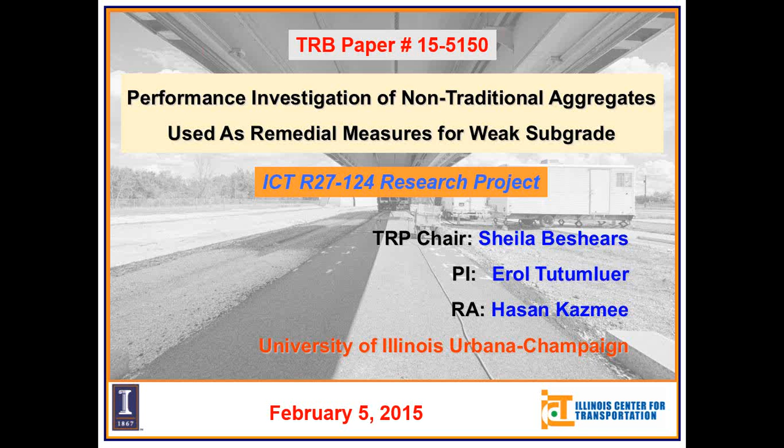Next, the presentation outline. First, we will present some background information. Then we will show the materials selected for this study for performance specification of aggregate subgrade materials. Then the test section layout proposed for construction of the test sections built for this project. We'll explain how we modified the subgrade strength to match a certain strength, like CBR3 or CBR1, followed by construction and quality control. Then we'll present test results from accelerated pavement testing and associated pavement forensics like dynamic cone penetration testing, variable energy panda penetration testing, ground penetrating radar, or even actual test section trenching images. Finally, we'll summarize the research progress from this project.

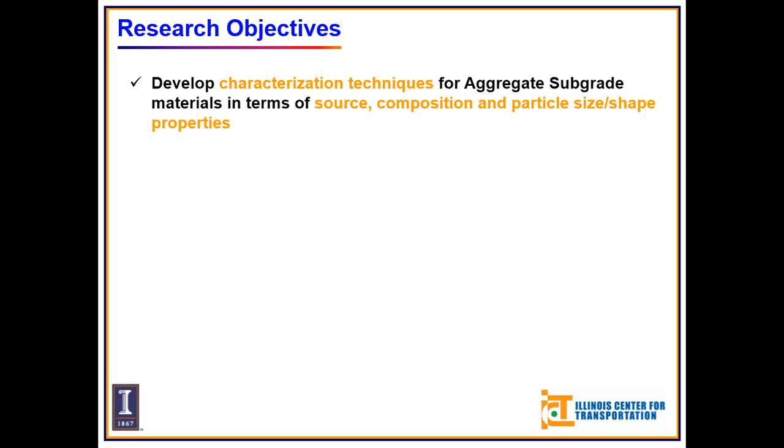Research objectives: the primary objective of this study is development of characterization techniques for aggregate subgrade materials in terms of source, composition, particle size, and shape properties. That means different districts of IDOT use different types of aggregate subgrade or sub-base materials for weak subgrade stabilization, and for a majority of those materials, we don't know how they will behave in the field. Some materials are so large, like 6 to 8 inches top size, that conventional laboratory testing is not enough to characterize their properties. So that's why we were shooting for evaluation of field performance.

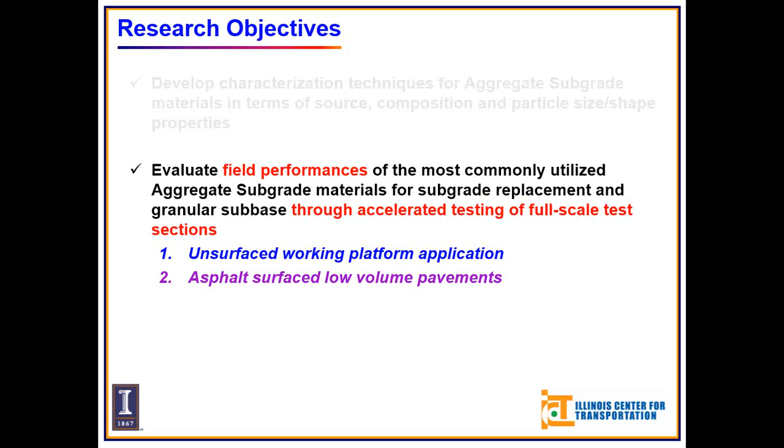How do we do that? We construct test sections with those materials and perform accelerated pavement testing. For this, we have built 12 different combinations of unsurfaced working platform or construction platform, and 12 different combinations of asphalt surface low volume pavements. According to those results, we'll then revise and develop material specifications governing the use of these materials.

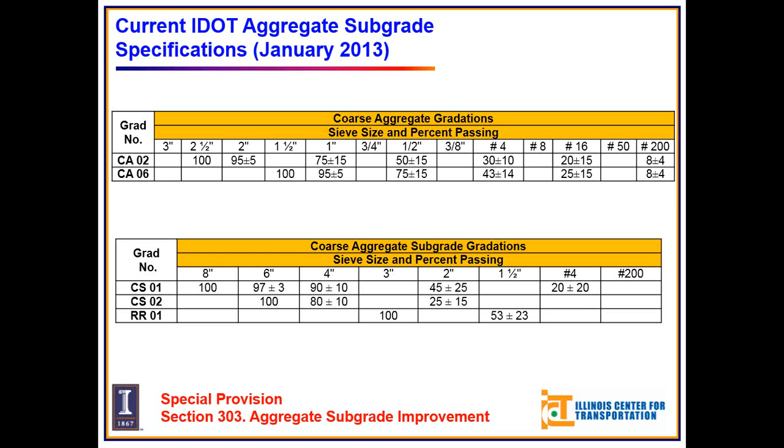And finally, we came up with 6 different types of aggregates for aggregate subgrade material and 2 different types of materials for capping material. The 6 different types were named type A, B, C, D, E, and F.

Type A was the railroad ballast size material, called RR01 gradation. Type B is large size crushed concrete, rubblized concrete opted to fit in the CS01 gradation band prescribed by IDOT. Type C is basically primary crusher run.

Most of type C is in the size range of 4 to 6 inches, some even as large as 8 inches. Then we have a 60-40 blend of large recycled concrete and recycled asphalt pavement materials, which was also expected to fit in the CS01 gradation. Type E is the coarse fractionated RAP with very limited fines, even less than 1%.

Type F is the large size base course aggregate, CA02. It's very similar to CA6 material but with a larger top size, meaning 2.5 inch. And finally, type G is the capping material, the typical Illinois base course aggregate, a dolomitic material that fits in the CA6 gradation band.

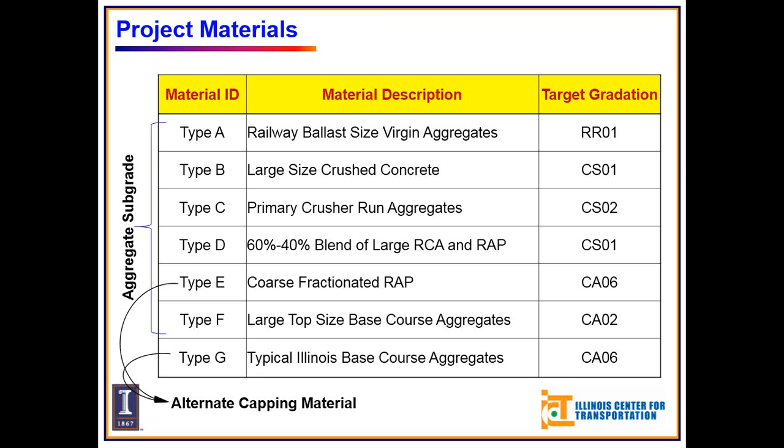These two are recycled materials: type B is the crushed concrete and type D is the 60-40 blend. These are somewhat well graded, but type D doesn't fit in the CS01 gradation band we were expecting. Type G and E are comparatively very well graded, and type G had almost 10% fines.

And finally, type F is the CA02, almost similar to CA6 material, just with a larger top size. Here we've got the top size as 2.5 inch.

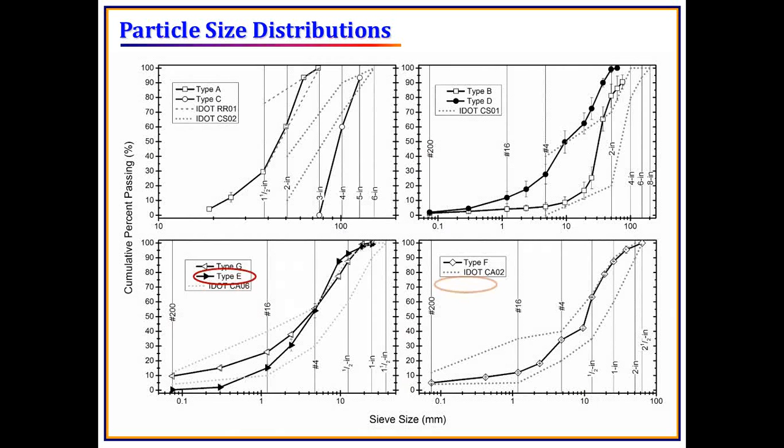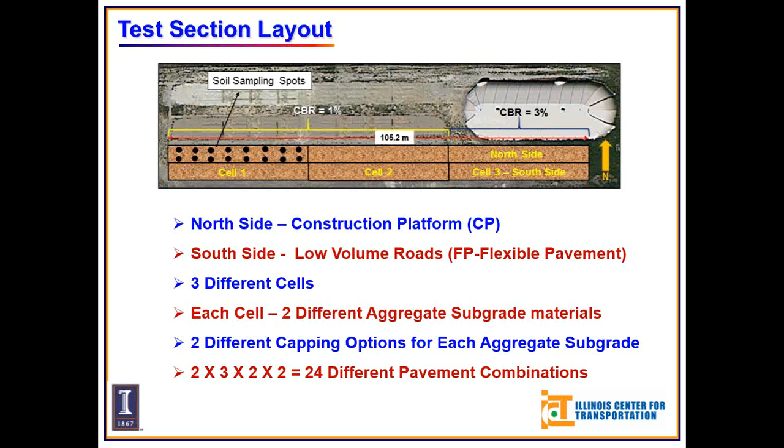So we divided the whole test strip into 3 different cells, cell 1, 2, and 3, and each of the test cells has 8 different combinations of pavements. On the north side, we have 4 different combinations of construction platform, and on the south side, 4 different combinations of HMA pavements, so 24 different pavement combinations.

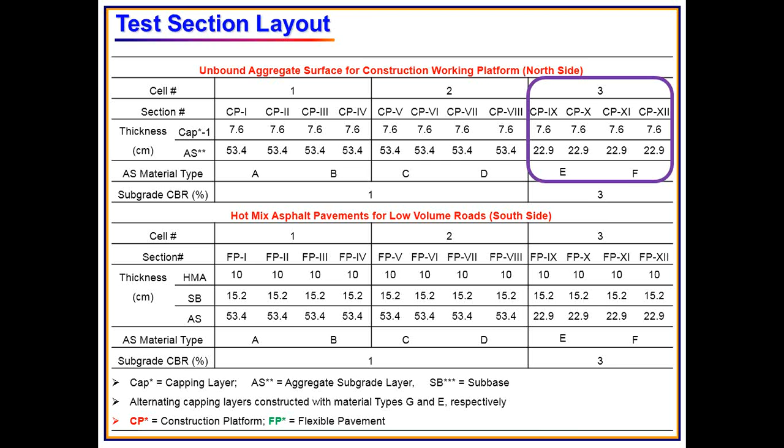Because of time limitations, my discussion will only be limited to the cell 3 construction platform performance evaluation. These were the overall layout of the ATLAS test setup. When we place one cell of material on top, it can cover up to 4 sections on one side, so what I'll be discussing will be construction platforms CP9, 10, 11, and 12, these 4 sections.

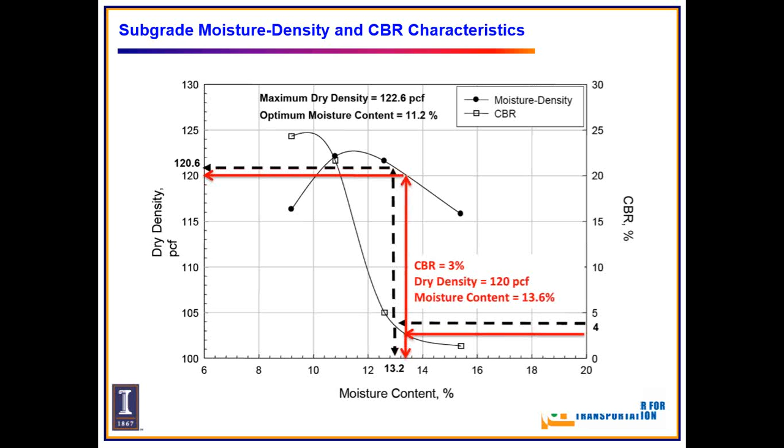Before going to the field, we had already established the moisture density relationships the soil was exhibiting, and for that corresponding density and moisture content, what our strength level was in terms of CBR. So that was already established. Like for CBR 3, the dry density was 120 PCF, pound per cubic foot, and the moisture content was 13.6. Similarly, for CBR 1, the target moisture content was 15%, I guess.

So we went out to the field, scraped the materials, tilled them to a depth of 12 inches, and then collected soil samples and identified the moisture amount with the microwave. We were trying to plot the moisture profile all over the test strip, like for cell 1 or cell 3, whatever we were targeting, and after plotting the moisture contents over that longitudinal and transverse distance, we were identifying the zones of moisture deficiency.

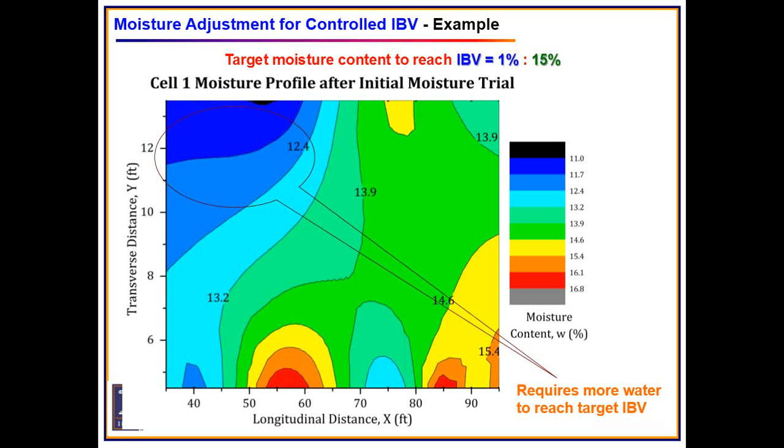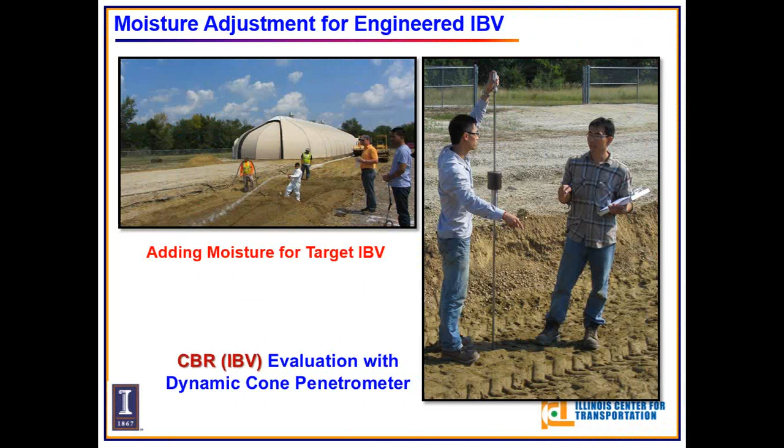These are some pictures of the construction and quality control that we've done. Once the subgrade strength was matched, we sealed the subgrade with an asphalt coating so there was no moisture escape, and on top of that the aggregate subgrade materials were placed.

In the meantime, we tried to maintain a grade since the compaction of this type of aggregate subgrade materials, which are very large size, sometimes becomes very difficult. So that's why we tried to maintain the grade using a laser guided grade control. Also, on top of the aggregate subgrade materials, we placed aluminum foils so that we can track subsurface deformations or subsurface rutting with the ground penetrating radar.

We have also used a nuclear density gauge to check the density, and also used a lightweight deflectometer and geogauge for the in situ stiffness parameters. Once we constructed the pavements, this was the finished capping surface and the finished HMA surface, with increments of rutting progression during the accelerated pavement testing.

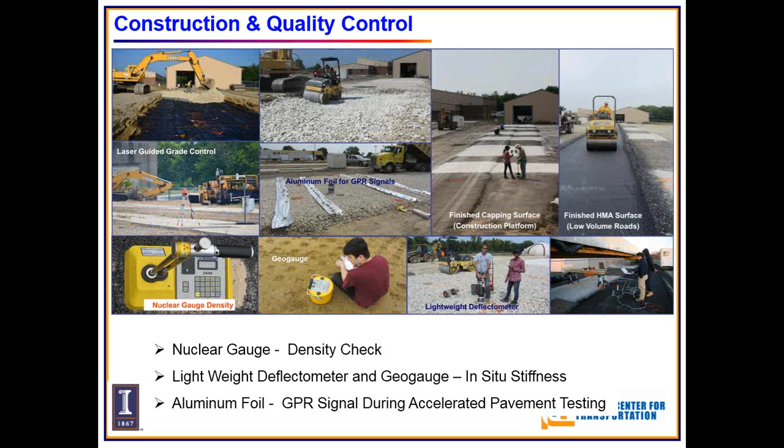We have also done the ground penetrating radar scanning. This was the nuclear gauge density. For sections 17, 18, 19 and 20, section 17 refers to CP9, 18 refers to CP10, and 19 refers to CP11, and so on.

So in cell 3, for the aggregate subgrade materials, type E and type F showed very similar levels of compaction, and the dashed line you can see is actually the laboratory compaction characteristics that were earlier established in the lab with a standard compactive effort. Compared to this line, we can see that both type E and F showed comparatively lower achieved densities.

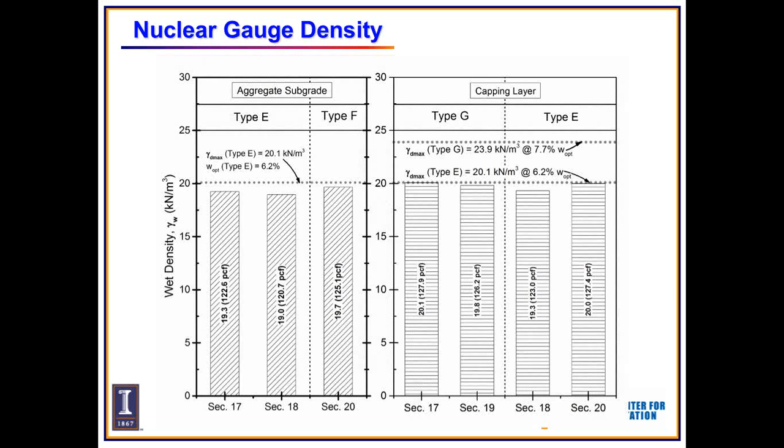Similarly, we have traced the nuclear gauge densities on the capping layers. All of these densities were checked with the backscatter method for the limited thickness. Compared to the type G laboratory maximum dry density, it was quite lower, but throughout that cell, we have seen that both type G and type E showed very similar levels of compaction.

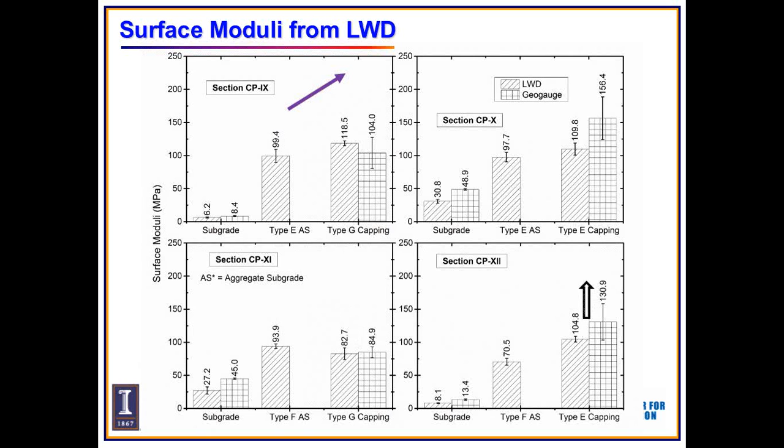These were the surface moduli from the lightweight deflectometer testing. We just used the Boussinesq half-space equation they prescribed to come up with these surface moduli. As expected, with the inclusion of every layer, there was a general trend that the surface moduli was increasing, and compared to the virgin aggregates, the type E aggregates, that's the RAP, was exhibiting higher moduli. That was also validated through previous literature studies.

Then we have also done the strength assessment with dynamic cone penetration testing as well as PANDA penetrometer. PANDA is basically a variable energy penetration testing. Along with that PANDA penetration testing, we did geoendoscopy. It's basically: you do the PANDA penetration testing, take out that cone, and through that same borehole, you shove an endoscopic camera, a small endoscopic camera, to see what sort of things are going on beneath the surface.

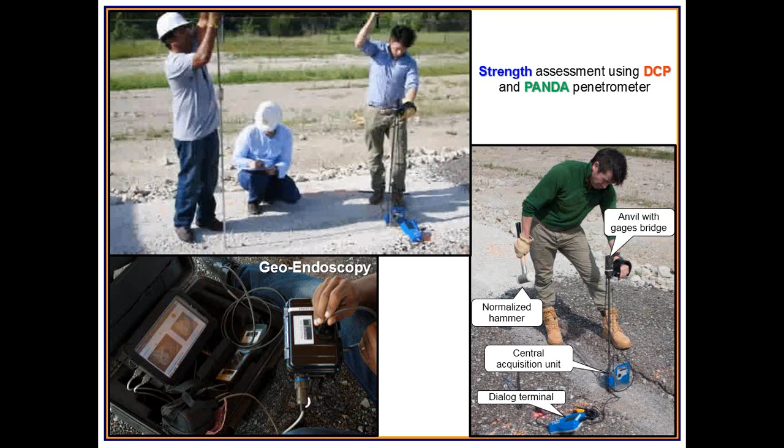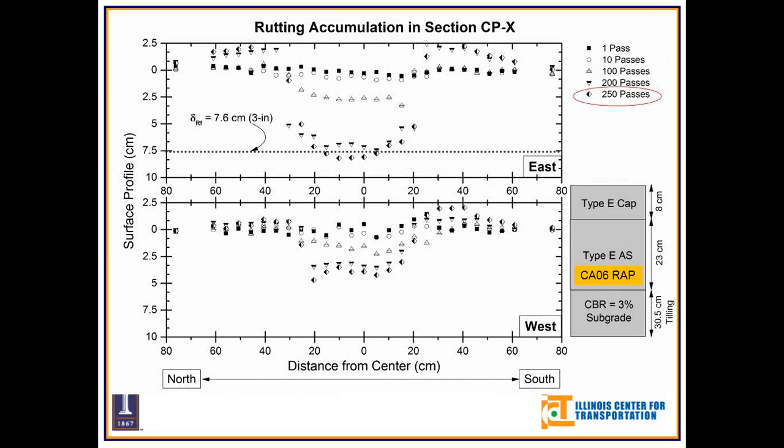With a somewhat lower number of passes, section CP10 was built with a RAP capping on top of RAP. That means we were supposed to have 12 inches of RAP materials, and we basically did the accelerated pavement testing on that, and it survived only 250 passes. Also, the aggregate is failing within its own structure, and some of the deformation is transferring to the subgrade.

These are the ground penetrating radar scannings. As you can see, this was done after 200 passes, and after 200 passes, section CP9 virtually showed no sign of deformation compared to the other sections. These 2 sections, section CP11 and 12, have already failed. This has survived up to 200 passes, and as you can see on this one, this has failed earlier.

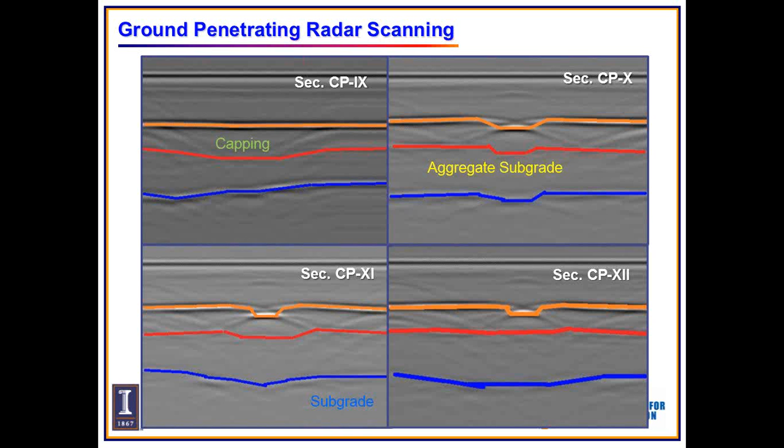One thing I need to mention is that the RAP cap sections, that means sections 18, 10 and 12, showed a higher magnitude of deformation compared to the CA6 dolomitic capping layers on the other 2 sections.

This section, CP11, failed at 150 passes. This was the overall profile that we got, and this was section 12 test results.

Compared to the other sections, you can see that there was a lot of thickness variation going on. And if you look at these sections, you'll see that the target CBR values were right on the CBR3 line compared to the RAP cap sections. So that's why these sections actually performed less than the other two sections.

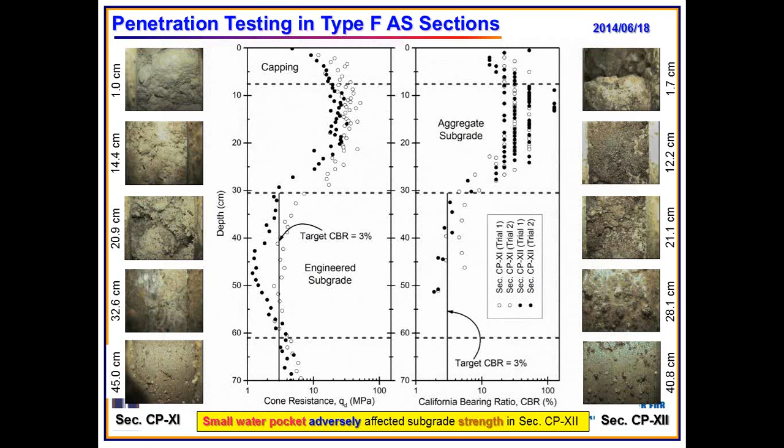So higher thickness of RAP aggregate subgrade layer contributed to somewhat better performance compared to the CA2 virgin aggregates. And even though section CP10 had higher RAP thickness compared to section 9, it failed early, which means the virgin aggregate capping in section 9 played a major role in stabilizing the weak subgrade.

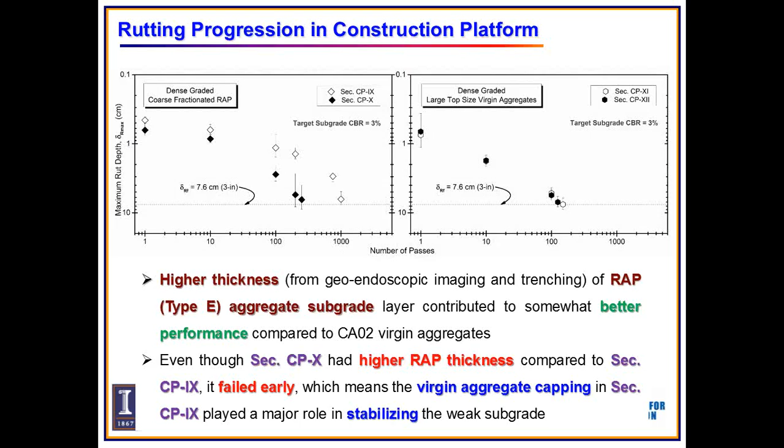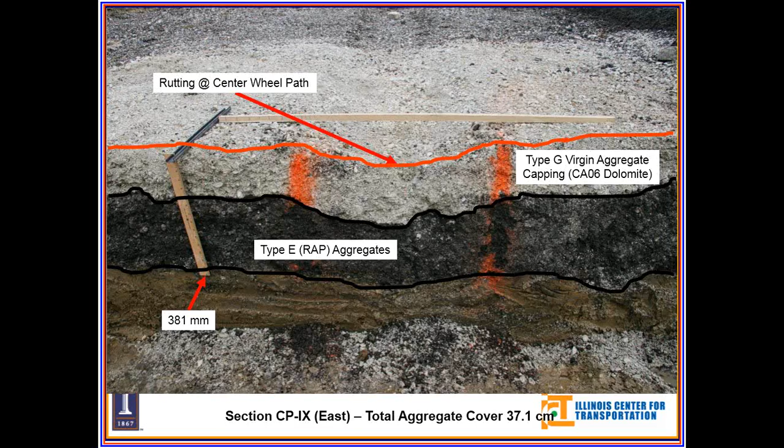Even if you look at the trenching pictures, let me go back a few slides, you'll understand that. This was supposed to be only 3 inches, whereas the RAP thickness was supposed to be only 9 inches. But if you look at this picture, you'll see that instead of 3 inches, it ended up somewhere around 5 to 6 inches. So that contributed to the superior performance, what we believe right now.

So that sums up the TRB presentation, whatever we presented in TRB. Now for the research progress, we have already completed all the accelerated pavement testing on both construction platform as well as on the low volume roads with HMA surfacing. Also, trenching on all 10 sections was conducted to assess the actual layer thicknesses.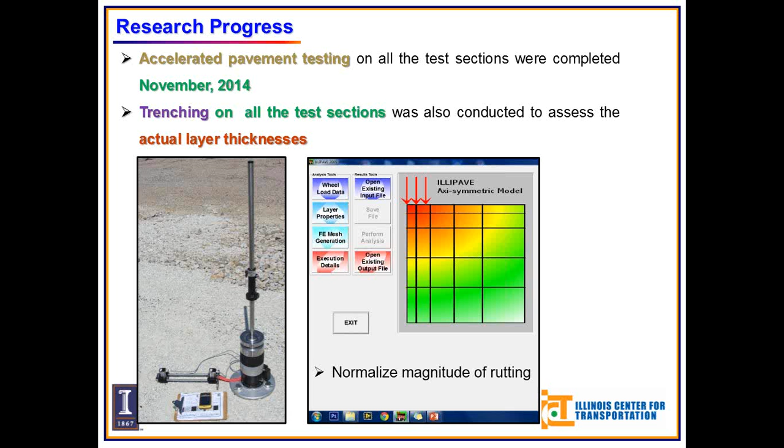Right now what we are doing is we have done some lightweight deflectometer tests with these additional geosensors. From those deflection basins, we are trying to correlate the nonlinear material performances using the ILLIPAVE based models, and then when we have got those moduli values from that ILLIPAVE, we are going to normalize the magnitude of rutting, basically again using ILLIPAVE, with respect to the load level that was applied during the accelerated pavement testing.

So that sums up my presentation. Any questions?

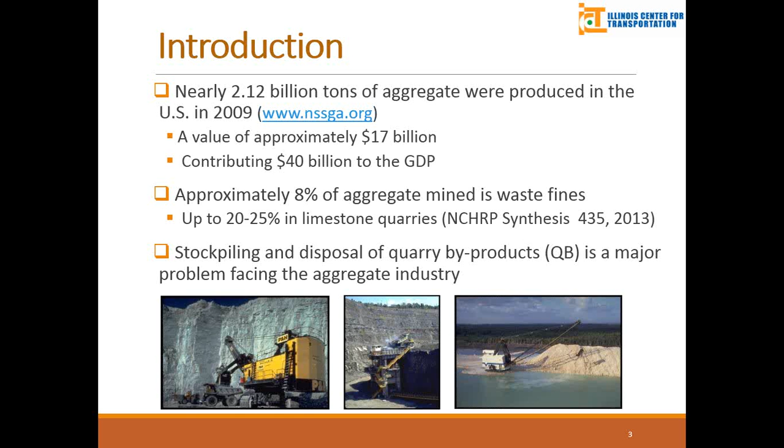Regarding the Illinois state, new practices are moving to finer gradations, which means we'll have more waste fines because of more crushing and screening. We are also going to utilize more recycled material, which will result in more fines. So that's the motivation of our research. What about the applications in the world?

The figure on the top right is the number of countries conducting research on the use of these quarry byproducts. You can see it's mainly Europe and the United States. The main focus of applications for these quarry byproducts is concrete, and geotechnical applications.

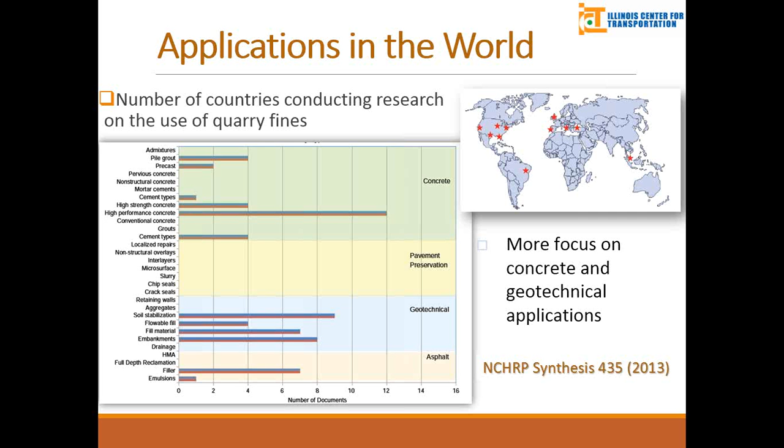So what about in the US? This is the map showing the applications of these quarry byproducts in the US. We can see they are mainly on the eastern side of the country, with pretty much none of the applications shown on the western side. Also, most applications collected are hot mix asphalt and surface treatment, with only 5 applications for embankments, which is the subgrade.

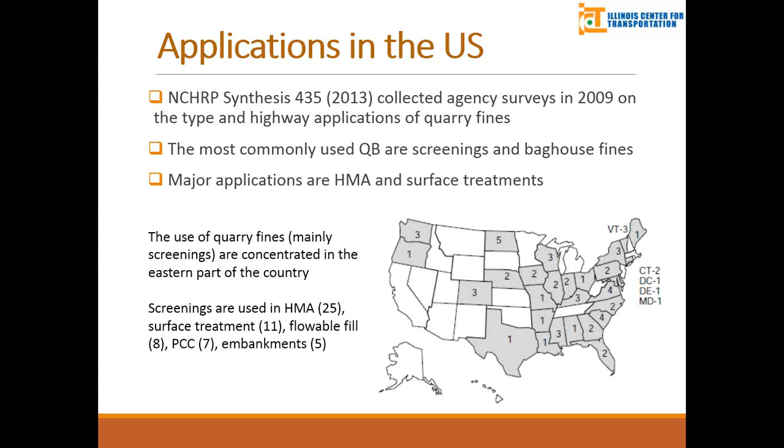So we're more interested to see what kind of applications, or potential applications, these products may have for the subgrade.

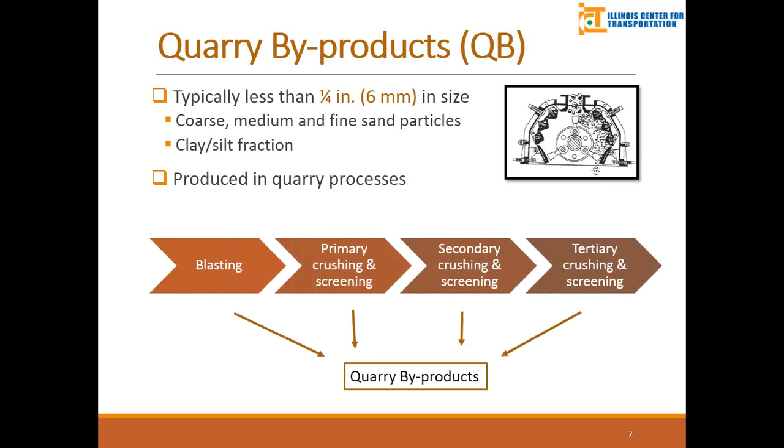So quarry byproducts - by saying quarry byproducts, we mean materials less than 1/4 of an inch in size. They're mainly coarse to medium to fine sand particles, with some clay and silt fraction. They are produced in multiple processes in quarry production, from blasting to primary, secondary, and tertiary crushing.

These are some typical characteristics for quarry byproducts from the literature. We can see the gradations, particle shape, and other physical properties, as well as moisture content and mineralogy can be very important to these characteristics. The literature also shows that untreated quarry byproducts have very low strength and resilient modulus.

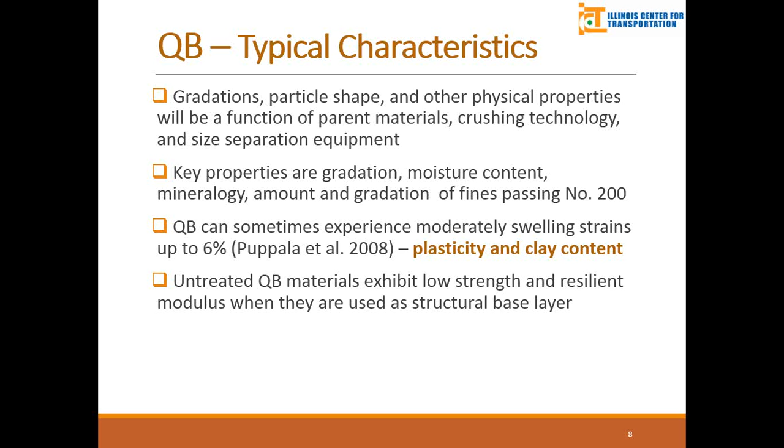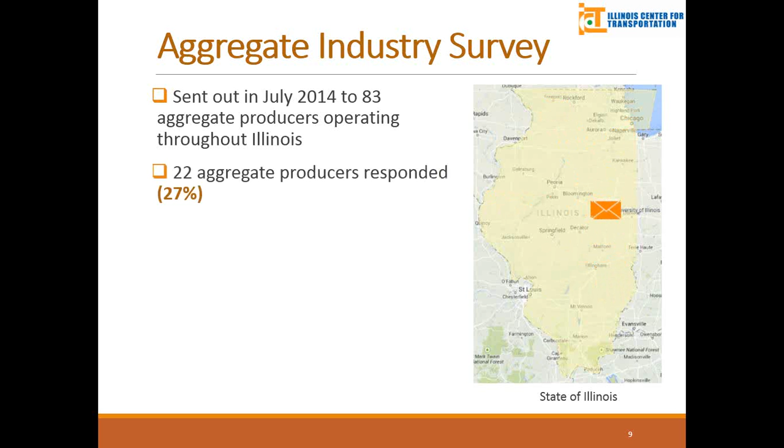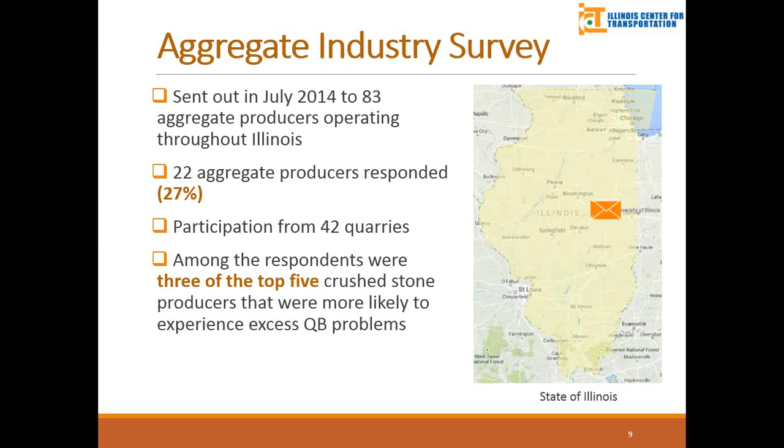To start our research, we began with the industrial survey. In 2014, we sent the survey to 83 aggregate producers throughout Illinois. We had respondents from 22 producers, representing 42 quarries. Among all respondents, there were 3 out of the top 5 crushed stone producers. They are more likely to have these excess quarry byproduct problems.

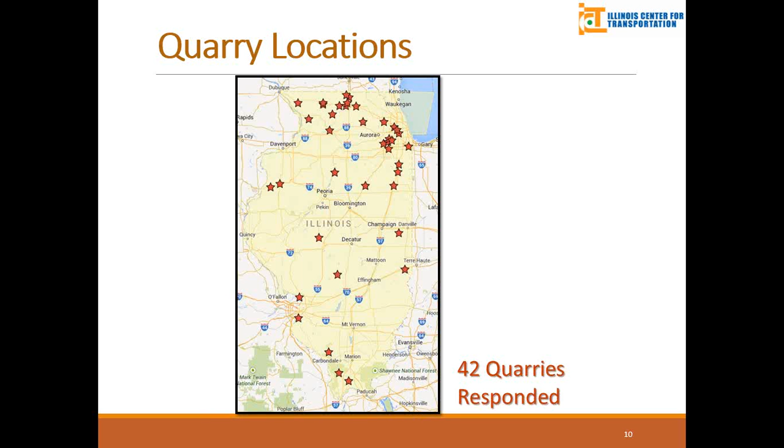This is a map of the locations of the quarries that responded - you can see it's almost all from the north to the south of Illinois. So we have some results from the survey. The typical annual tonnage of quarry byproduct production: we can see over 55% reported they have greater than 100,000 tons of these quarry byproducts.

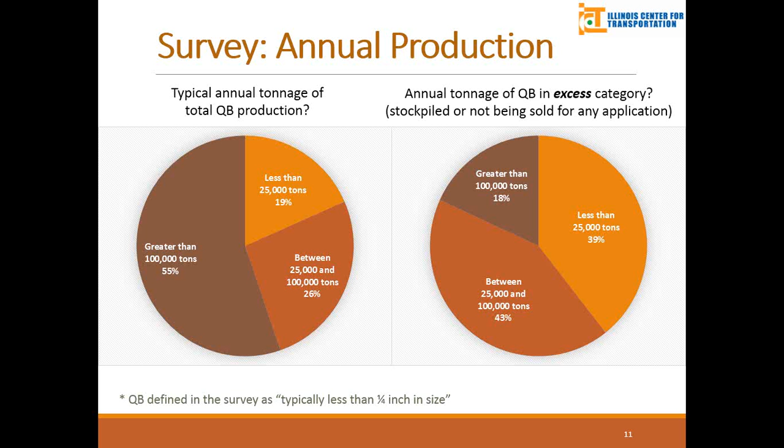Also, 18% report that they have more than 100,000 tons that are in excess category. By this, we mean they are stockpiles, not being sold or used in any applications.

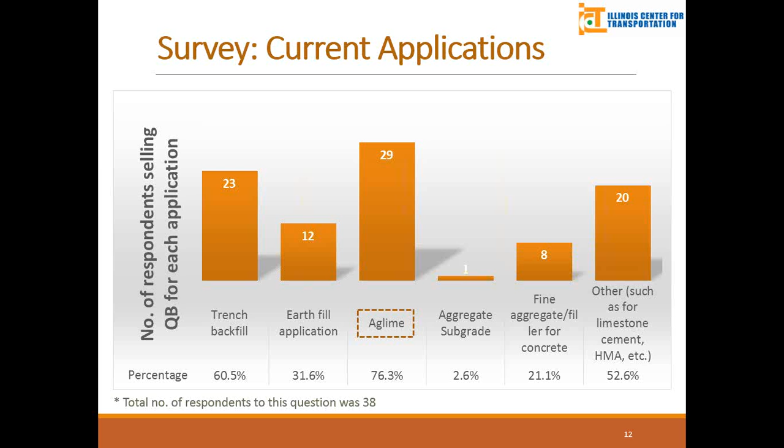This is the current applications for the Illinois producers. We can see most of them say that they will sell their quarry byproducts as aglime. Aglime is one agriculture use, not in transportation use. And only 2.6% say they will use them as aggregate subgrade. So maybe there's a potential we can use them in this application.

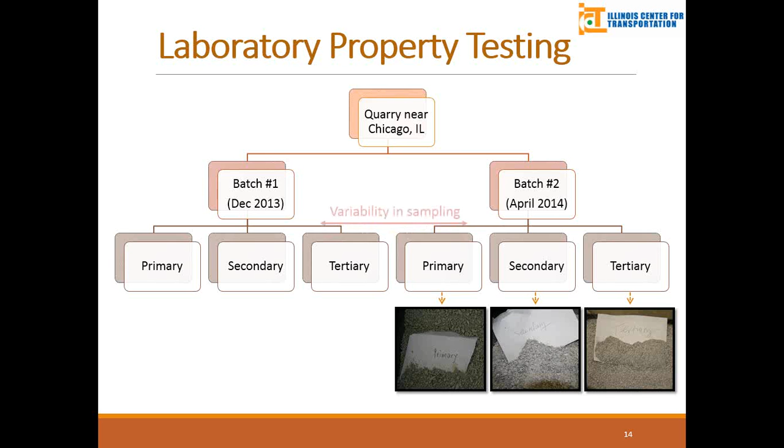So from a quarry near Chicago, we have 2 batches of materials. For each batch of material, we have them from 3 crushing stages: primary, secondary, and tertiary crushing stage. So for the 2 batches, we want to see the variability in sampling, and from the 3 crushing stages, we want to see the variability in crushing stages.

This is a closer look at these products. This is the product from primary crushing. You can see they are more like sand instead of fines, and they are more rounded.

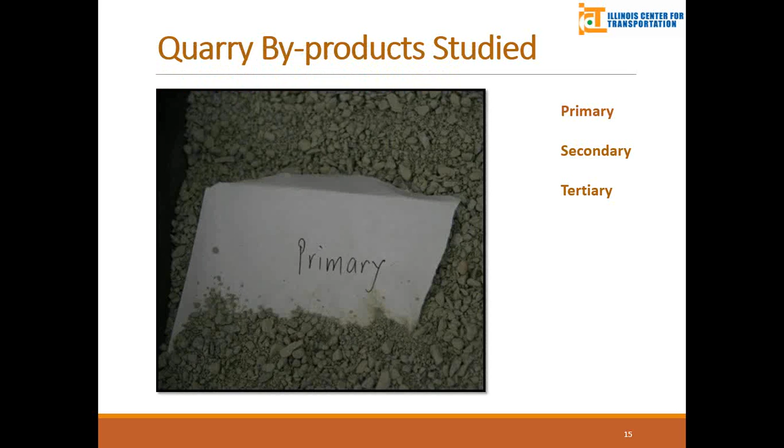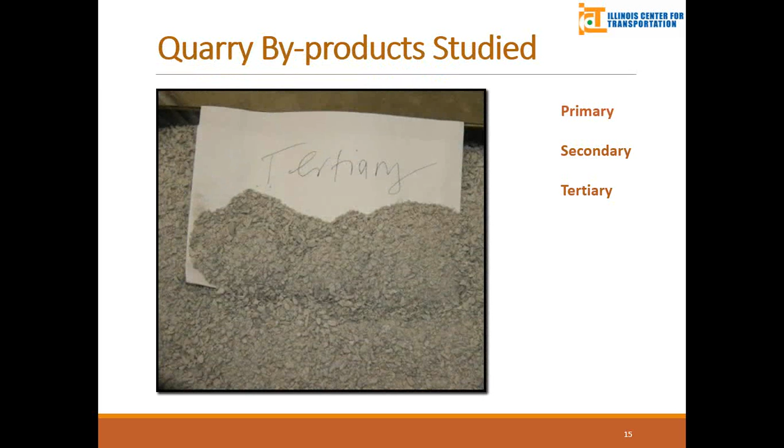This is the material from secondary stage. They are more flat, and more sub-angular. Tertiary is a little closer to the secondary in visualization.

So after this, we started our laboratory characterization, first with the chemical composition, followed by the grain size distribution and Atterberg limits, so that we can classify these soils.

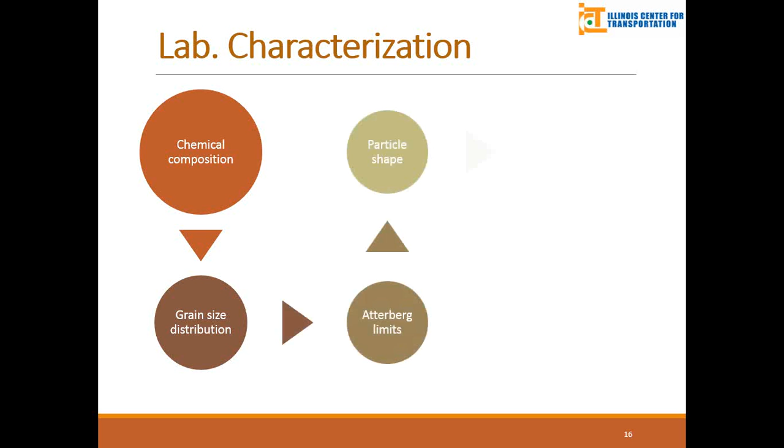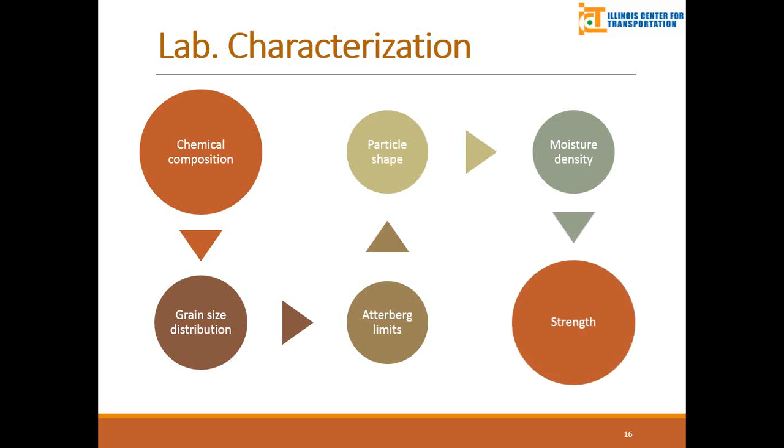Then followed by the particle shape using the imaging machine, and then the moisture density curve, so that we can know the maximum density and the optimum moisture content. And then followed by the shear stress and compressive stress testing.

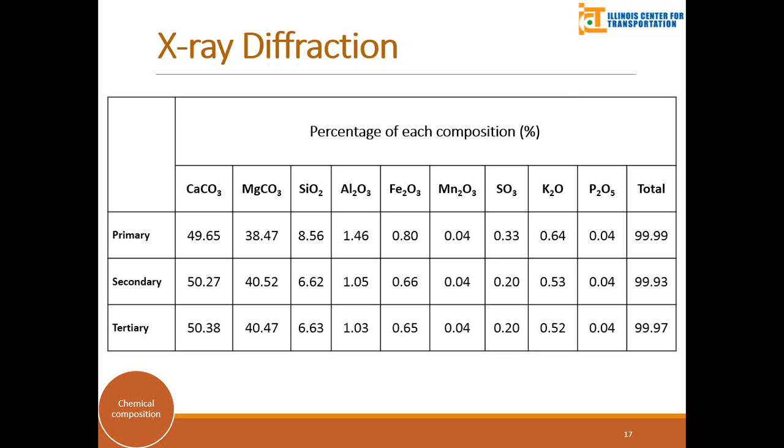So Vincent will take over the other half.

Okay, thank you, Wentig, for going over the overview of the project. I'm going to go through the lab characterization of quarry by-products. As you see, we started off with sieve analysis, and the purpose for sieve analysis and other tests we did, like Wentig said already, is just to understand the possible difference between these 3 types of materials and find how we can improve them.

We also took a look into 2 batches, as Wentig mentioned, just to understand the possible difference that might come when you sample different samples at different times.

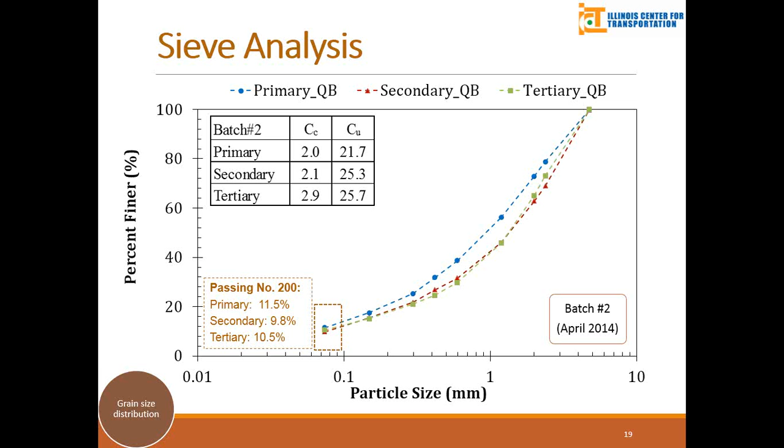So we went to the modified methylene blue test, which is a test to characterize these byproducts in terms of clay content composition. The most important tool for this is the colorimeter, which you can see there, and the methylene blue, which is a liquid. We mix it with the quarry by-products, and then we shake it, take it back to the colorimeter, and then we get the values of the clay content for those materials.

So as expected, we found out that primary had the highest clay content, followed by secondary and tertiary. But generally, the clay content for these materials is not very high.

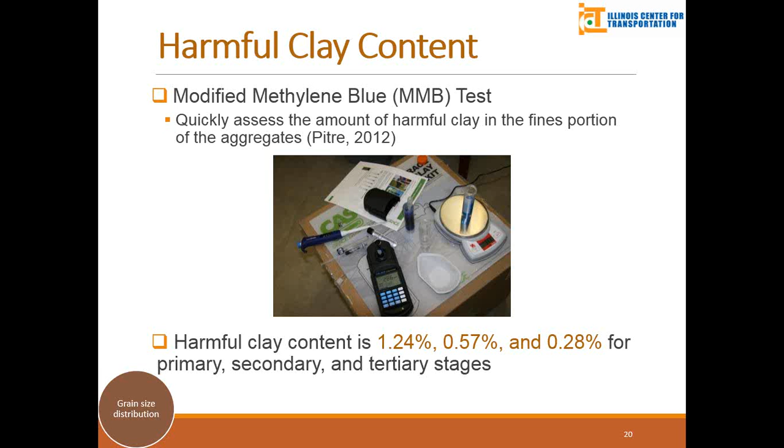We were expecting primary to have slightly higher clay content because during blasting and extraction of the rock, it's exposed to soil and other deteriorated materials, which might be having clay content from the Earth's surface. But after primary crushing, you are basically removing all those materials, and then you are having fresh rock, which is why we think the clay content reduced as you go from primary to tertiary.

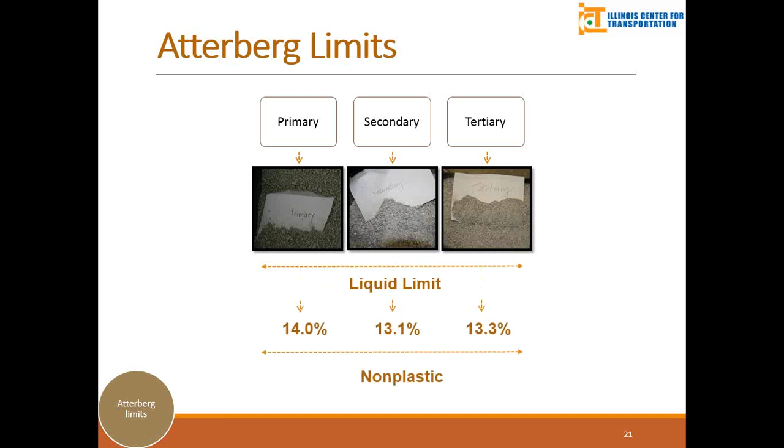So Atterberg limits, we also conducted a general test for soils, and we found out that it was around 14 to 13, and all these quarry by-products are basically non-plastic in nature. We were able to find this information and match it with the literature review. So the soil classification, the sample classification of quarry by-products, as we said, we did it for two batches, the first batch

and the second batch. For the first batch, generally the quarry by-products were characterized as silty sand from well-graded to poorly graded. But for batch 2, it was well-graded silty sand, and there was no difference in primary, secondary, and tertiary.

To understand more about the gradation and the difference that might exist between primary from batch 1 and primary from batch 2, we used fineness modulus, which we calculated for both samples. We found out that for secondary and tertiary, there is no big difference. That's secondary batch 1, secondary batch 2, comparing the two. The same applies to tertiary, but for primary, there was a slight difference compared to secondary and tertiary.

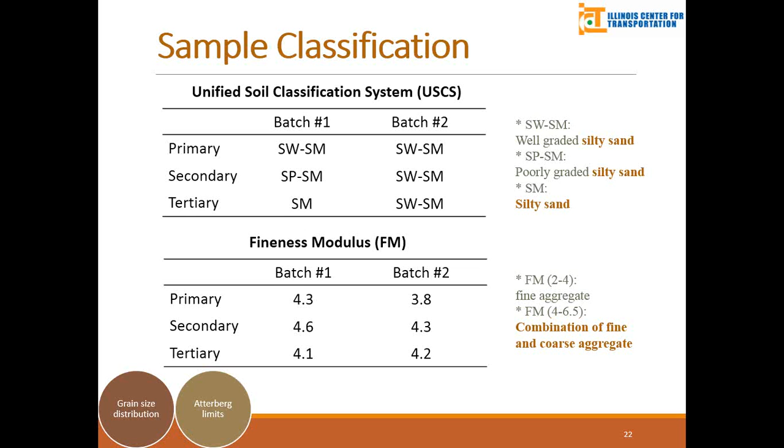We also conducted image analysis to understand the particle shape and size of these byproducts. Our focus was on angularity and the F and E ratio. From what we saw for secondary and tertiary, there is no big difference, but primary showed some slight difference compared to secondary and tertiary.

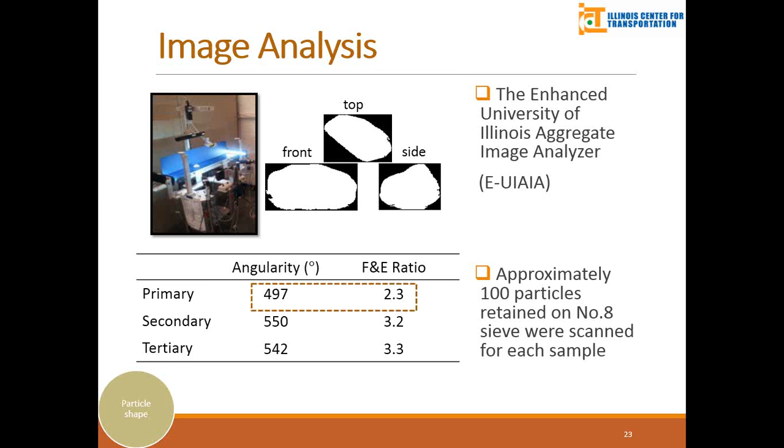So now we started characterization of these materials. We started moisture density testing, which is a typical test done for soils. We found that the maximum dry density just decreased as you move from primary, secondary, to tertiary, with optimal moisture content between 10.4 and 8.6.

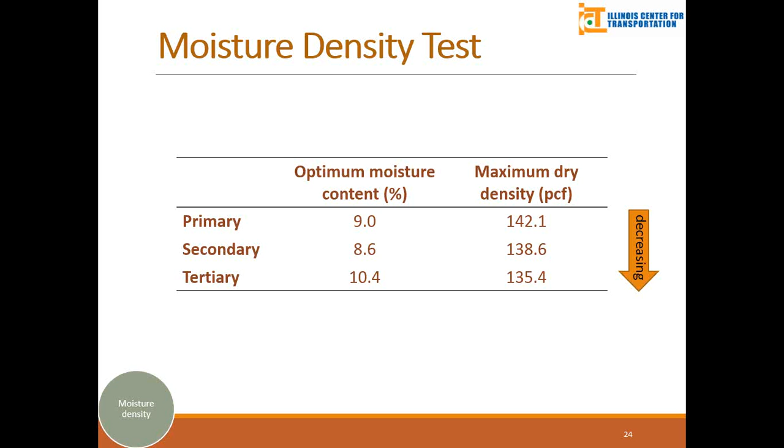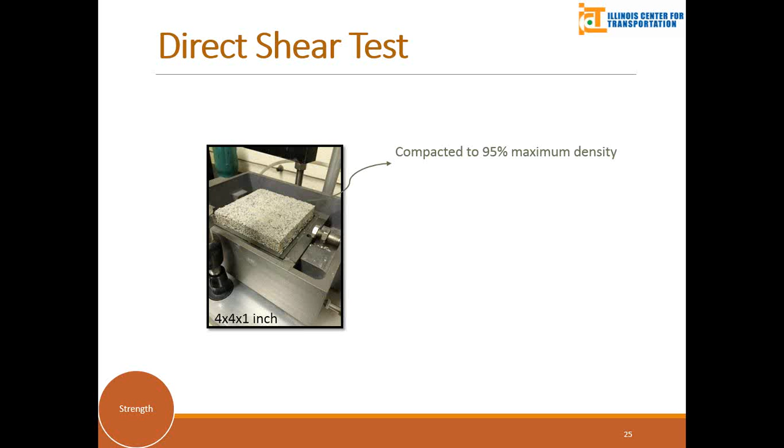Then we went to direct shear testing to understand the shear properties of these byproducts. We understand the particle shapes might be different, and this might create some differences in the shear properties, so I wanted to take a look at it before we go further. What we found out is that during the testing, there were actually no big differences recognized.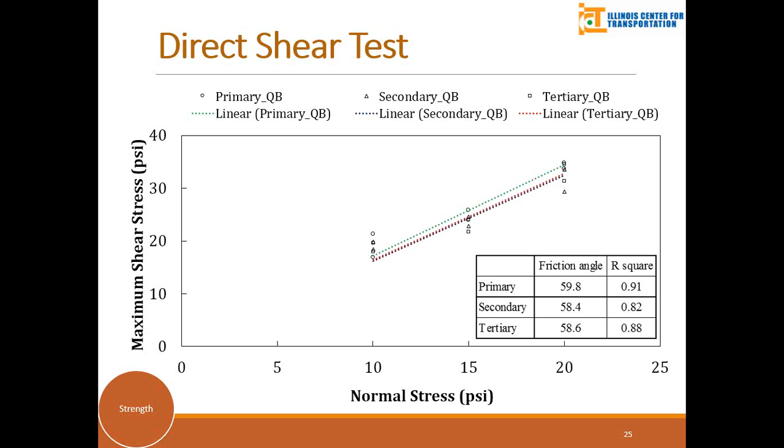The only surprising thing was the friction angle, which was really high for these materials. This was probably attributed to the compaction we did before when we were preparing the samples. We compacted the samples to 95% of the maximum dry density, and we think this might be one of the reasons we have high friction angles.

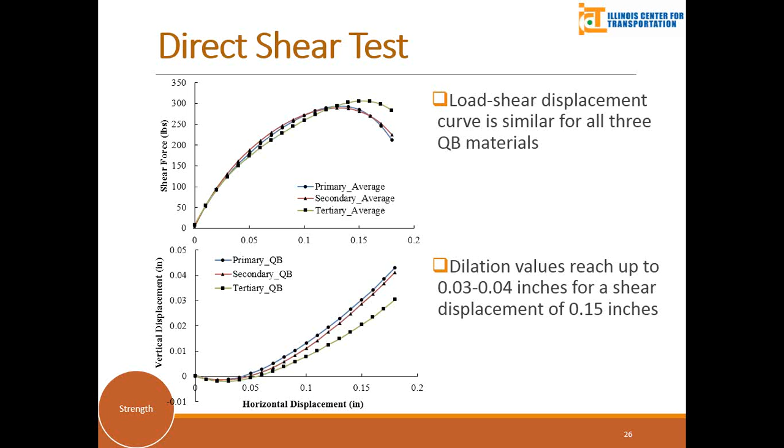In terms of shear testing, we also extracted some information to see any difference that exists in the primary, secondary, and tertiary byproducts. In terms of load shear displacement, all the curves behave pretty much similar. For dilation values, the range was between 0.03 to 0.04 for both of the quarry by-products.

So then we did UCS testing. This is strength testing to see if these materials are ready to go out in the field and perform well. What we found out is that the primary, secondary, and tertiary all showed very small UCS values, and these values are close to a CBR of 2, with tertiary actually having a CBR of less than 1.

So all these strengths were really very small, and we decided to use some stabilization to improve the properties of these byproducts before we tried them out in the field. So we tried 2% cement, 5% class C fly ash, and 10% class C fly ash. We are emphasizing not only cement, but also class C fly ash. Basically, class C fly ash is a byproduct on its own, so using a byproduct to stabilize another byproduct would be a plus if it works well.

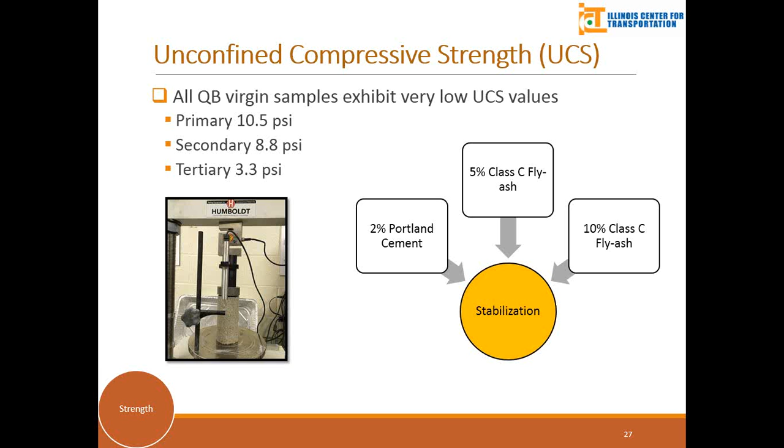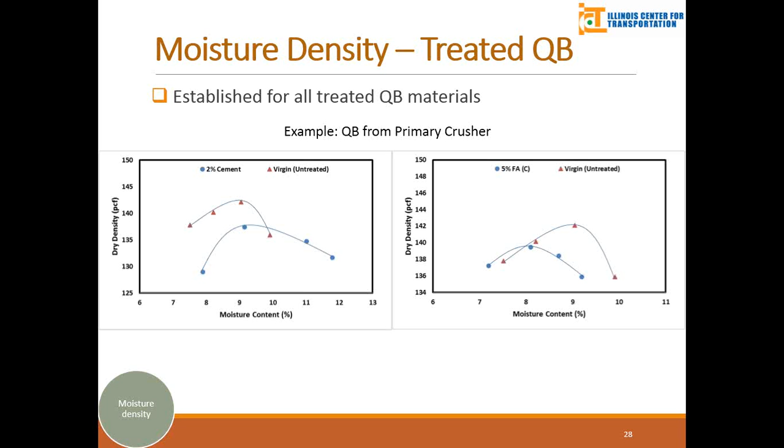So we started off with characterization of the stabilized quarry fines, that's the moisture density testing with cement and fly ash. The only thing I want to mention here is the addition of cement reduced the maximum dry density compared to the virgin material and then increased the optimum moisture content. While the addition of fly ash slightly reduced the density, the optimum moisture content decreased.

So after doing all the density characterization of treated quarry by-products, that's quarry by-products with the addition of cement or fly ash, we started testing the strength of the samples. We cured the samples for 7 days at room temperature under 100% humidity, and we soaked the materials 4 hours before we tested them, just to get a clear understanding of their behavior in wet conditions. So here are the values we found out. As you can see, the virgin material is around 10, with tertiary having around 4 psi.

After addition of cement, the values raised to about 200 psi for secondary, primary, and tertiary samples. The addition of 5% fly ash slightly reduced the values compared to addition of 2% cement.

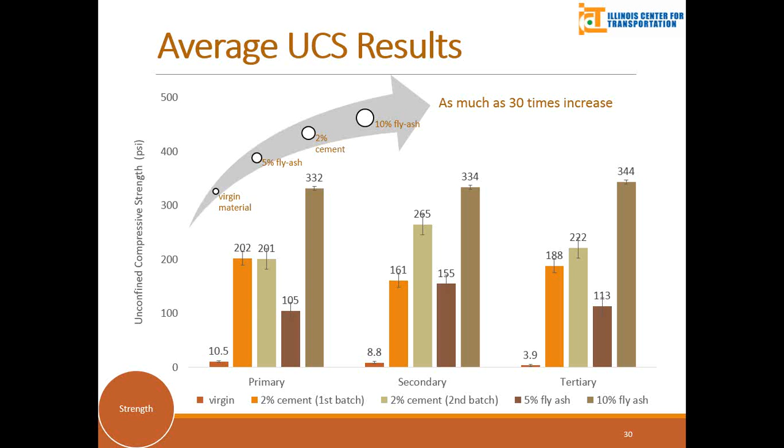Our purpose was to see how much fly ash we could use to get the same strength as 2% cement. So we decided to raise to 10% class C fly ash, and the results were around 300, which is basically around 30 times increase from the virgin strength of the sample. So both 2% cement and 10% fly ash were really promising.

Here is the summary of the findings. QB samples obtained are dolomitic type, as discussed already. These samples are non-plastic, as we have already discussed. The classification of the Quarry By-product is silt and sand-sized particles.

Primary QB samples were more rounded and cubical in shape. This can be seen not only in physical observation, but also using image analysis, we're able to see that primary samples were different from the other two samples.

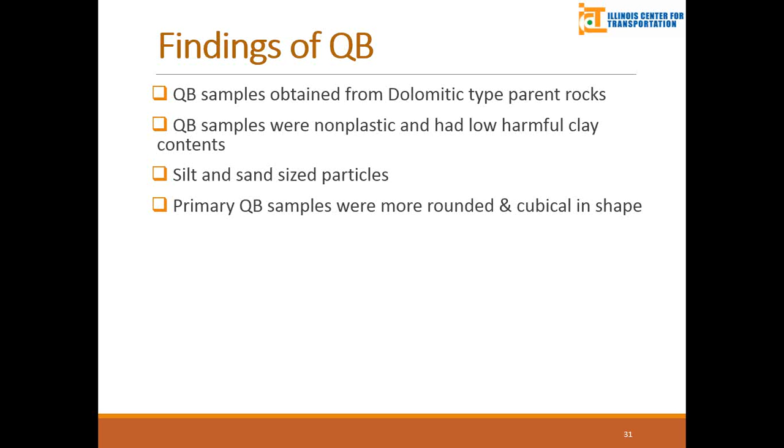QB samples have maximum dry densities in the range of 130 to 140 and optimal moisture content of 7 to 10.5%. Very low UCS of the virgin QB materials were observed, and then the addition of fly ash was able to raise the strength up to 30 times, which is really promising.

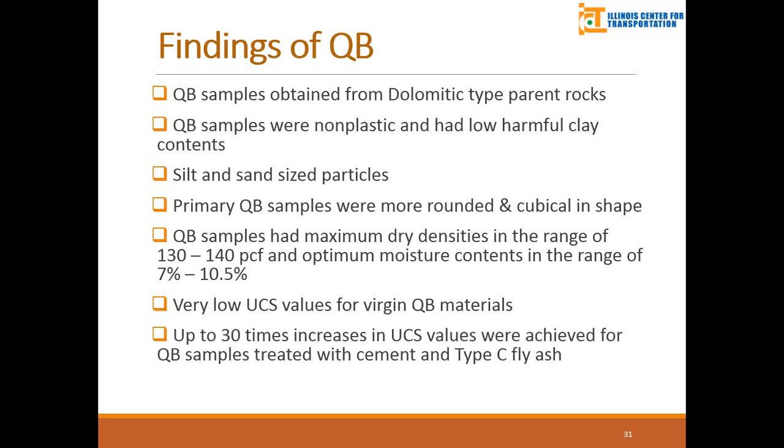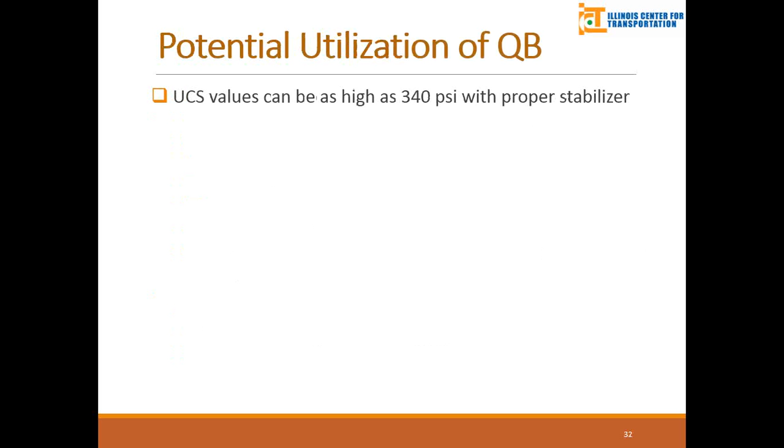So what are the potential utilizations from the testing? Improving the strength of the Quarry By-products. We suggest these materials can be used pending further testing or verification, such as for subgrade embankment as one potential application.

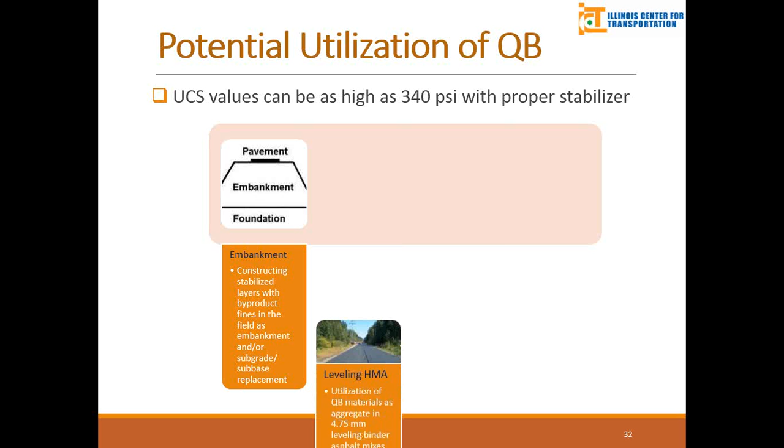We also suggest leveling HMA binder. I haven't looked much into this one, but I checked the gradation band and found out that addition of other aggregates with Quarry By-products can produce an aggregate gradation band within the Illinois specified leveling HMA binder. Beyond that, I haven't done much about this.

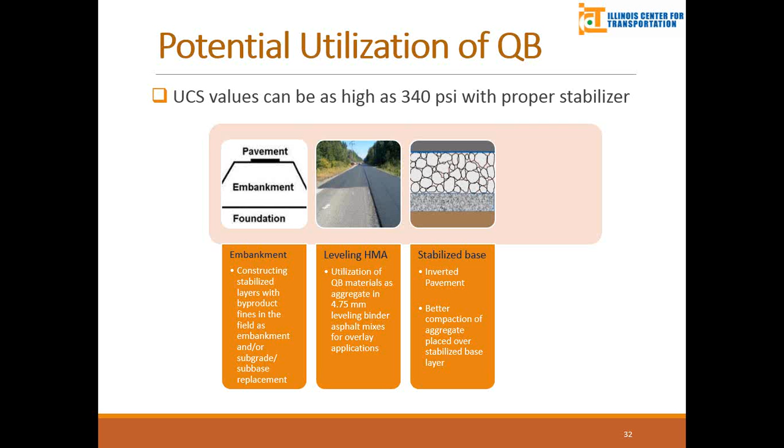Also, stabilized base using these by-products for stabilization in inverted pavements, where you have subgrade, then cement or fly ash treated soils, and then the base course on top of it. This isn't really common yet—it just started recently. I read some articles about it from China.

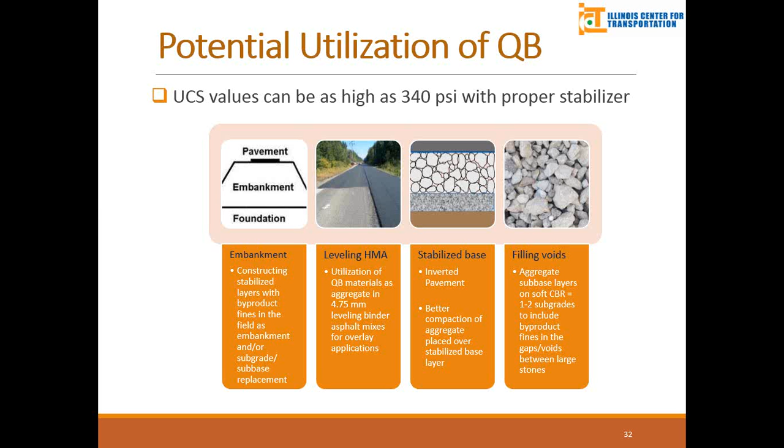So we suggest looking into this. The addition of these by-products might just close up the voids between the larger particles of the aggregate within the base course, and this might lead to good performance of these materials while consuming some of the aggregate by-products.

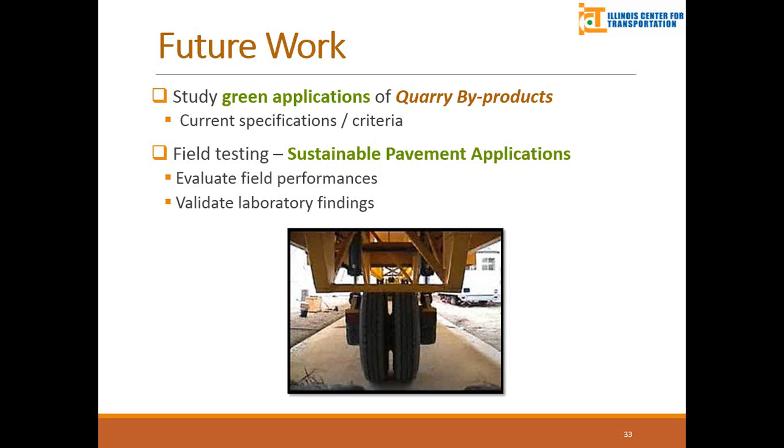Our future work is to go deep into the green applications and do field testing to validate the laboratory findings and evaluate the field performance of these materials. So this is all I have today—if you guys have questions.

Your future effort on green and sustainability, will that look into either cost savings or increase by having to stabilize versus just using the material itself? The material versus one of these materials that's stabilized?

We haven't looked into this yet, because I think it's still early. We still need to validate the application of these materials in the field and see if they really work before we go into that. But as part of this project, we are also finding the environmental benefits using life cycle assessment and of course the cost savings associated with application of these materials.

Yeah, the answer is yes, actually. In phase 2, all these options we're going to be trying out. Phase 2 will be a field validation study which got approved by IDOT now—hopefully we'll be approving it finally.

Questions? Comments? The interesting thing is the aggregate subbase use of filling voids in the aggregate subbase structure—there are a lot of voids, and I think that's what the IDOT sponsor of the project is very interested in, maybe combining the large stones, 6 to 8 inch, with these huge stockpiles of fines, so with less crushing of larger sizes, you can actually build pavement foundations in a sustainable way, which is another win-win in my opinion.